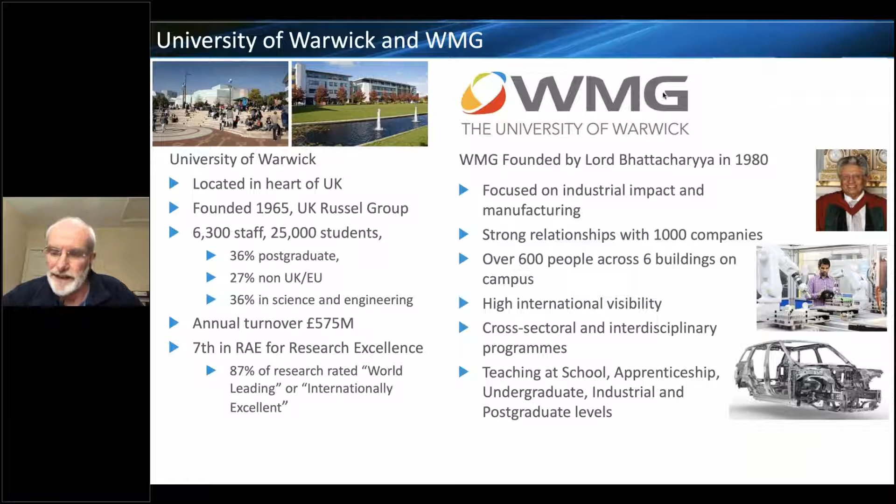I'm a Professor of Automation Systems at WMG at Warwick. For those who may not know WMG and Warwick, we're a department of Warwick University that has expanded greatly over recent years. We were founded by Lord Bhattacharyya in the 1980s, who built up our centre. We're also one of the seven High Value Manufacturing Catapult centres in the UK, so we're in a unique position as both an academic department and a member of this catapult organisation, spanning from early research through to commercialisation and industrial impact.

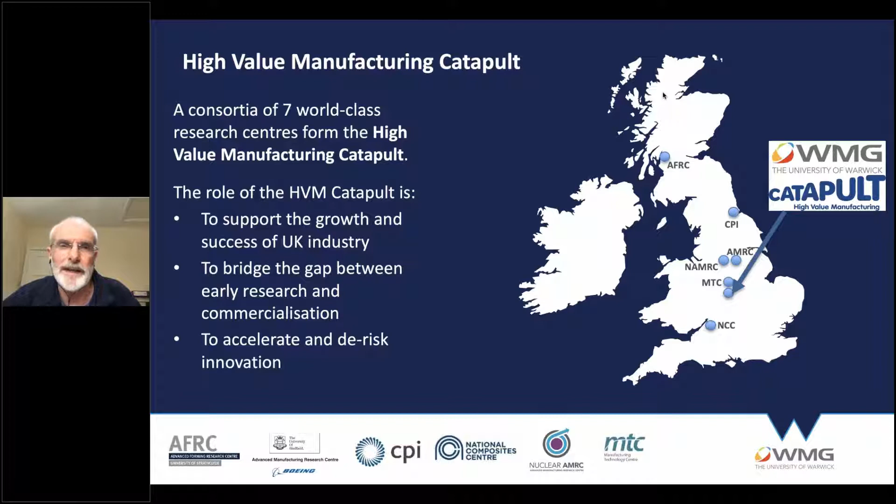On the manufacturing digital revolution: digital technologies are now impacting life generally, and in this talk, the way manufacturing operations are carried out. The term Industry 4.0, or fourth industrial revolution, is a trend in automation that combines several technologies, particularly interconnectivity and real-time data. It's the amalgamation and integration of technologies, as well as their individual, perhaps disruptive, capabilities and impacts. There's also the perspective of integrating digital technologies with physical manufacturing systems, known as cyber physical production systems.

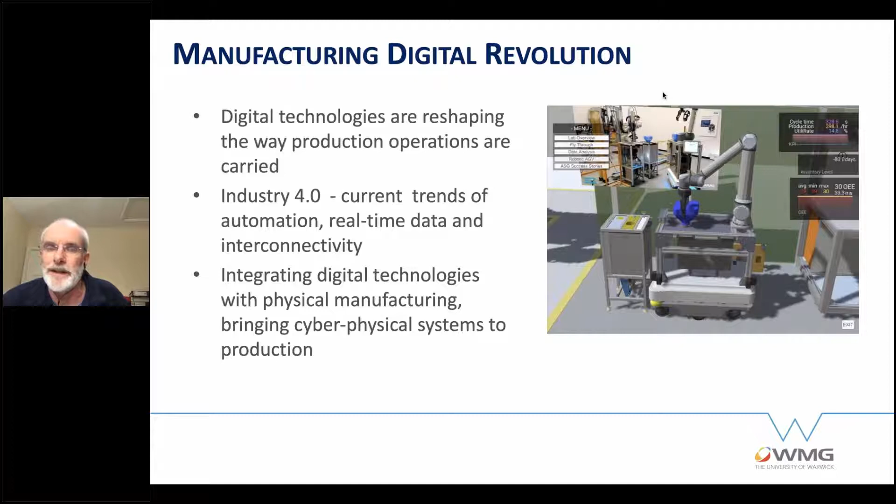The picture on the right shows examples of that, where there's a virtual image of an autonomous robot and a production system alongside its physical twin, in an environment where you can also display analytic and KPI data overlaid onto those scenes concurrently.

In terms of why and what these enabling digital technologies and capabilities are for, this slide, created by Koren, shows the trends from craft production, where you could have plenty of variety in a product, through to mass production, where you basically got one product as long as it was black, as Henry Ford put it, but at reduced cost while limiting product variance.

Now, coming back around the curve, that movement through mass production and globalization is heading towards more personalized products—from a volume and cost perspective, moving through to customization and user experience, and perhaps even more so now, not only having flexible systems but more resilient systems, where digital technologies can enable a lot more agility and reconfigurability in systems.

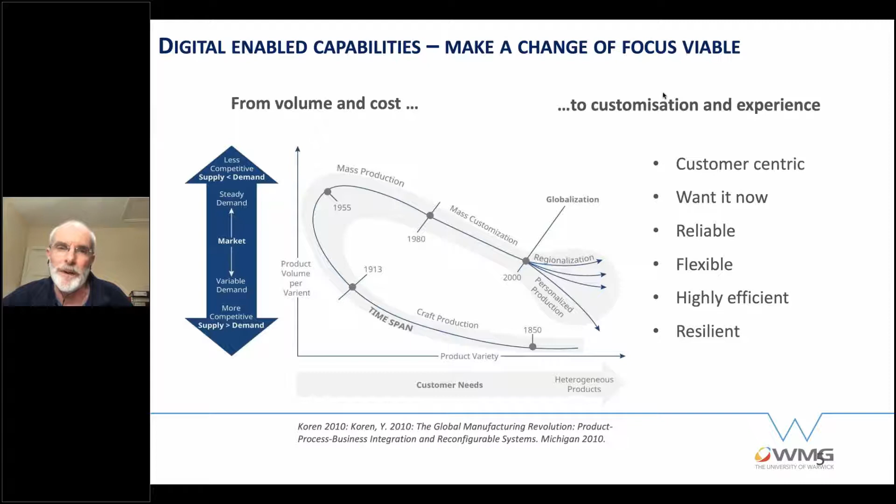I think all of you will be aware of Industry 4 as a concept, and perhaps the number of industrial revolutions that went before it - from steam power through assembly lines and mass production systems to the automation enabled by computers, and the advent of digital technologies in Industry 3, with Industry 4 being beyond that base level digital capability, moving to cyber physical systems.

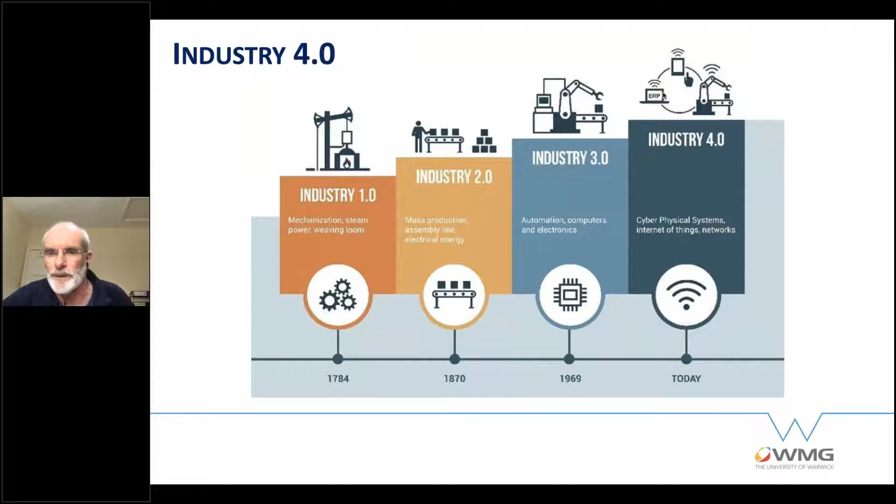I mentioned the Internet of Things, or the industrial Internet of Things in particular, and connectivity and networking in that context, linking both IT systems at the top floor down to the production systems at the lower levels, which in the past were really entirely separate.

So some key disruptive technologies - you'll see many perspectives and iterations and diagrams around this, but some of the key nine technologies are shown here in terms of simulation capabilities.

We'll see a lot around virtual models and simulation, the vital integration horizontally and vertically of systems, the industrial Internet of Things, the vital component of cybersecurity in these systems, and cloud computing at the higher levels, enabling collective devices broadly to be put together and high levels of computing power brought to bear.

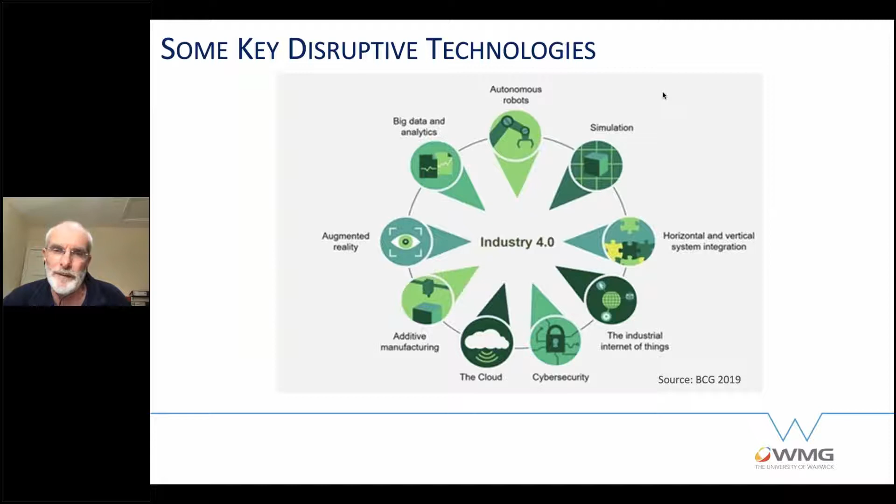Additive manufacture as a local, truly digital manufacturing perspective. Augmented and virtual reality are again important perspectives. And once we have hold of this data, the ability to use it via analytics is again a key component. Then at the top there, you've got robotics and autonomous systems, because another trend is towards more autonomous, independent, self-configuring systems in this technology perspective.

So why are we using and gearing off these digital technologies? Well, obviously this needs to impact business performance as well as the other aspects we've talked about earlier, in terms of perhaps opportunities now for more resilient production systems and flexibility. There are the sort of inherent aspects of what business models we can deploy.

Can we improve production in terms of cost and quality? Can we integrate and reuse what we have? Reduce time to market, which is obviously important - not to reinvent the wheel, but to utilize the models and methods we already have. Again, in the current context, can we reduce waste and run our systems more environmentally sustainably.

And connectivity across supply chains - in the smart factory context, as we'll see, that isn't just a single building, but a network and a connection of various factory entities, and the logistics and delivery systems needed to supply and integrate those. And then perhaps on the right hand side, that connected enterprise now is requiring and seeing this integration of information technology and the operational technologies on the shop floor.

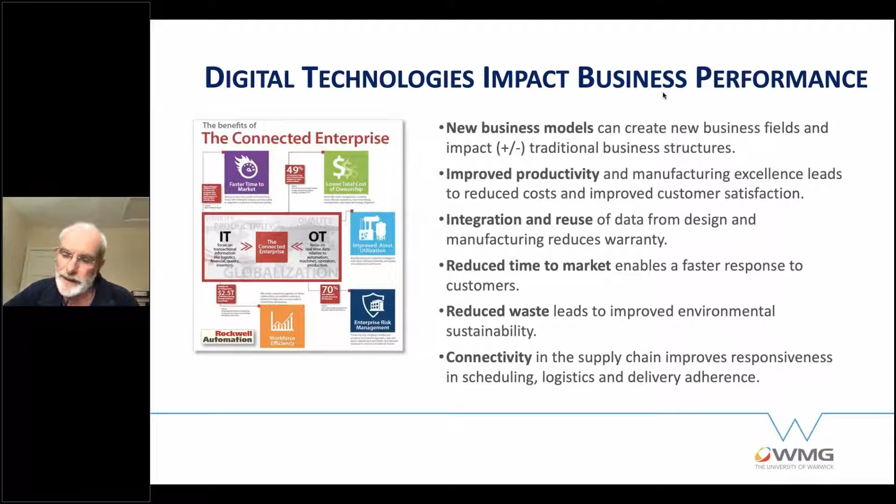From lower levels of embedded control and being able to pick up additional sensor data from the industrial Internet of Things, through building data models on top of the basic production system, so that there's the opportunity to model the physical systems and have ultimately real-time data from them, and then feed that into digital twins of those production entities, and so on.

It's vital to have security as we open up the areas of the system where they were traditionally closed and separate. Cloud services and infrastructure at the higher levels to integrate and provide the higher level perspectives, and then data analytics, machine learning, AI above that.

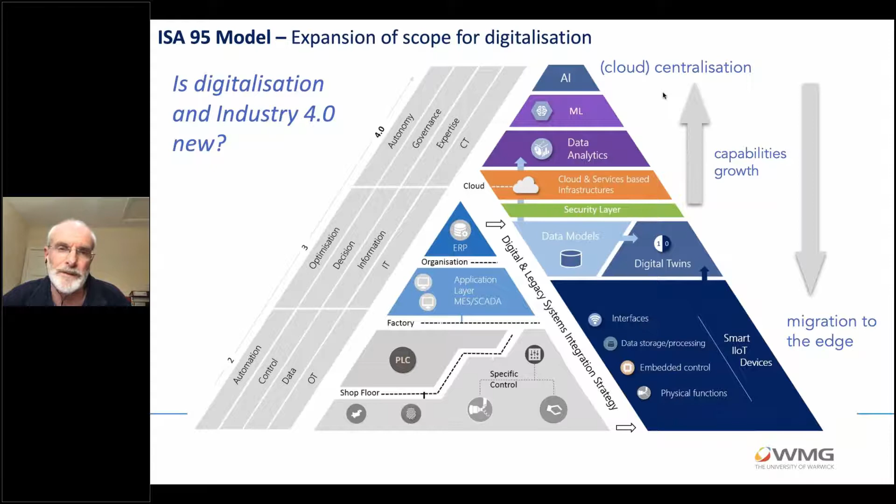So this is really very general and applicable to all domains, from the process industry, food industries, automotive, aerospace, etc. These are all generics that I'm talking about in that context.

So these are some points I'll quickly touch on. There's the seamless data exchange and communication, the use of IoT systems, cyber physical production systems to bring in smart machines, warehousing, and those production facilities. That's coupled with uniquely identifiable products, so each product knows its history, status, and how it's routed through the production system.

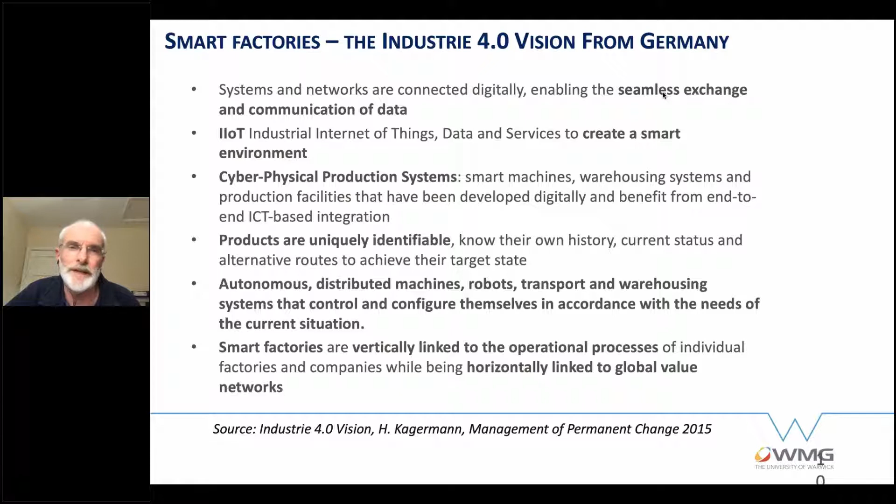There was also a vision of autonomous distributed systems, so each system can control and configure itself and adapt to the needs of the current situation. And then, as we've touched on earlier, smart factories being vertically linked to the operational processes and horizontally linked more widely in global value networks. So these were fundamentals seen at that time as being important.

And then out of that, it might be interesting to see the kind of amalgamation of these terms, methods, and approaches, and another buzzword that's gaining a lot of traction more recently has been around digital twins, dynamic representations of production systems which are updated potentially in real time.

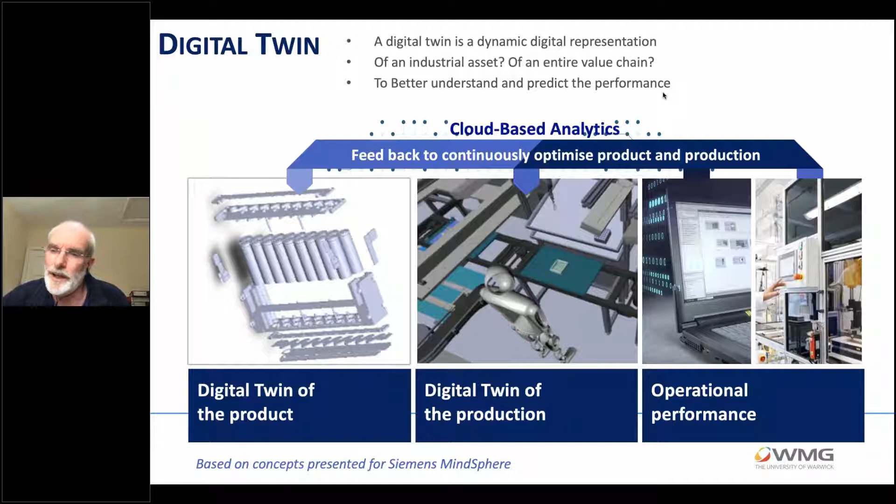In this context, you're able to cross-link between the digital, not only the operational system, but a digital twin of its production and a digital twin of the product, and then collectively being able to continuously optimize the product and its production. In whatever domain might be applicable, these digital twins and the underlying models behind them would be different, but the concepts and approaches would have a great deal of commonality in many ways.

So moving on to the myths and realities of this digital transformation. I've tried to go through the next few slides from some of the perspectives which are often mentioned, and to touch on, I hope, some interesting points.

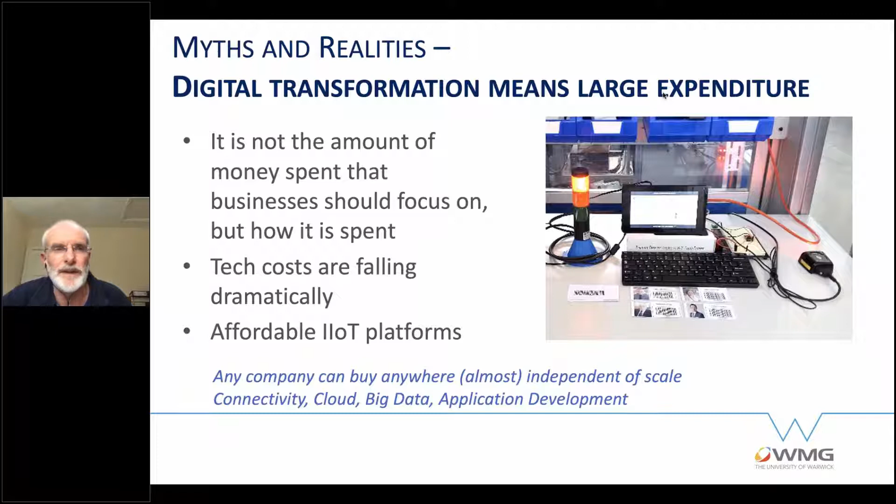Again, I think technology is too expensive - just to reiterate that point, MIT have done some studies, and we're really talking about an orders of magnitude decrease in the costs of what were traditionally expensive sensing, actuating, networking and computational devices. So GPUs and edge computing devices and so on are continually falling in price. There are a number of disruptive partners and companies coming into that market, and the traditional players are seeing competition from new entrants using non-traditional platforms for data processing, and indeed the traditional programmable logic controllers and industrial devices are seeing increasing competition.

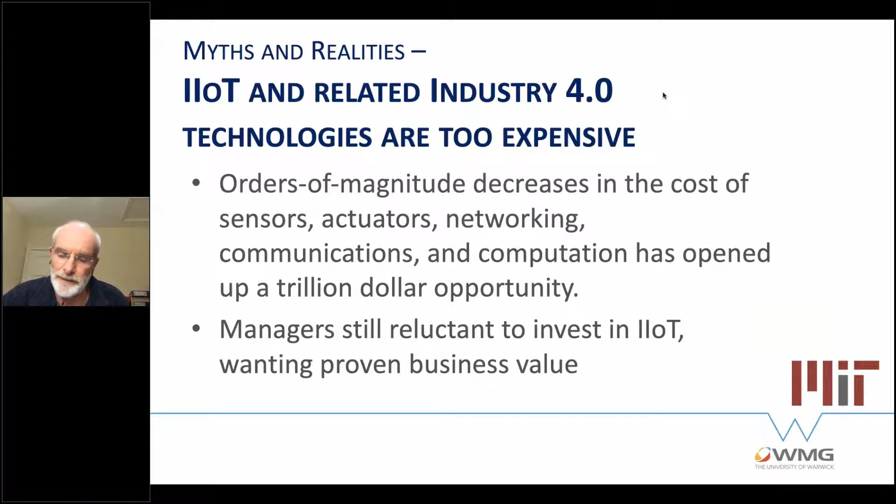In that context, managers are still reluctant to invest, perhaps. They want to see proven business value, and this is obviously a fast emerging and moving field.

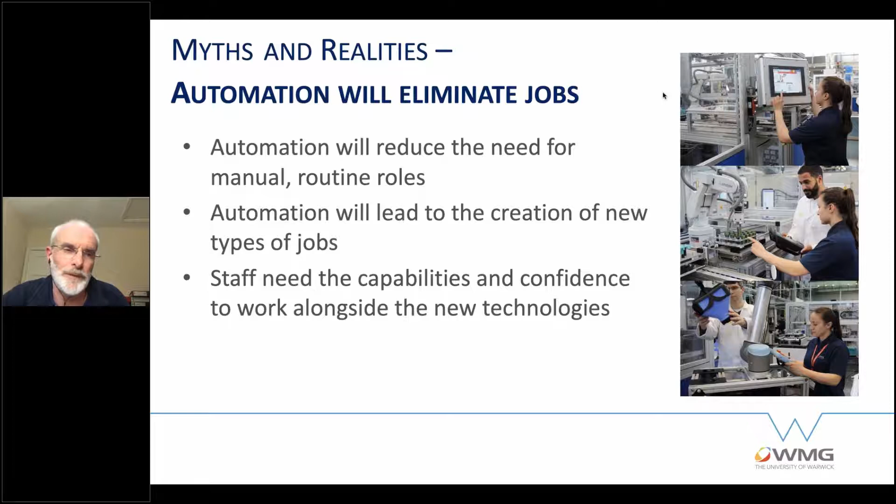Will automation eliminate jobs? I think it's inevitable that automation will reduce the need for manual routine roles in manufacturing, and we're seeing examples of that already. On the counter to that is the creation of new types of jobs, and staff capable of working with and alongside these new technologies and methods will prosper in that context. Hence the importance of skills training, retraining, providing relevant skills to graduates, and continuous through-career education.

Data, big data. Data is essential everywhere and a fundamental part of Industry 4 and the digitalization initiatives, and that's throughout the life cycle, from the way systems are built and designed through their operational phases to their reuse, and indeed through their use with the customer, because these are all areas of connectivity and integration that can add value and provide services. So data is key.

Simply collecting data is not enough, and we've had numerous examples in our projects where we'll get huge amounts of data presented to us, but it may be incomplete to solve the problem you want, or of very poor quality. There may be missing aspects of the data, or it may be collected in inadequate ways. So data needs to be leveraged, which may initially mean cleaning up and very much understanding that data before you start to try and analyze it and model it.

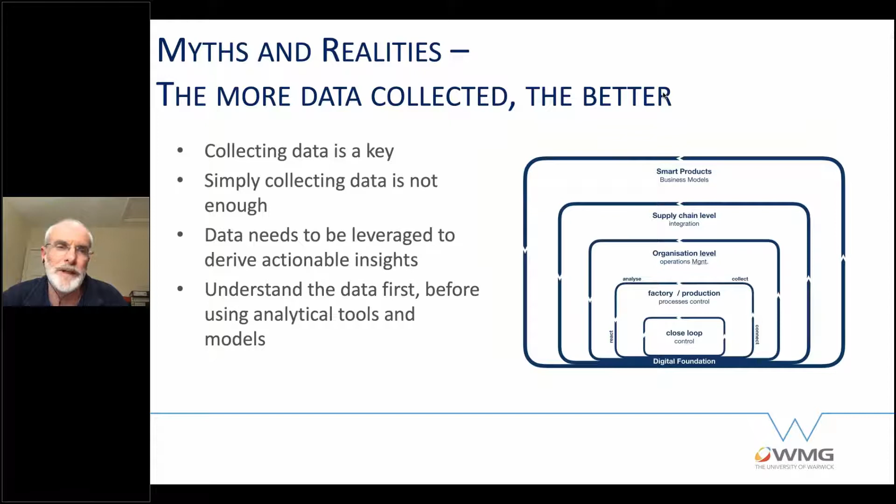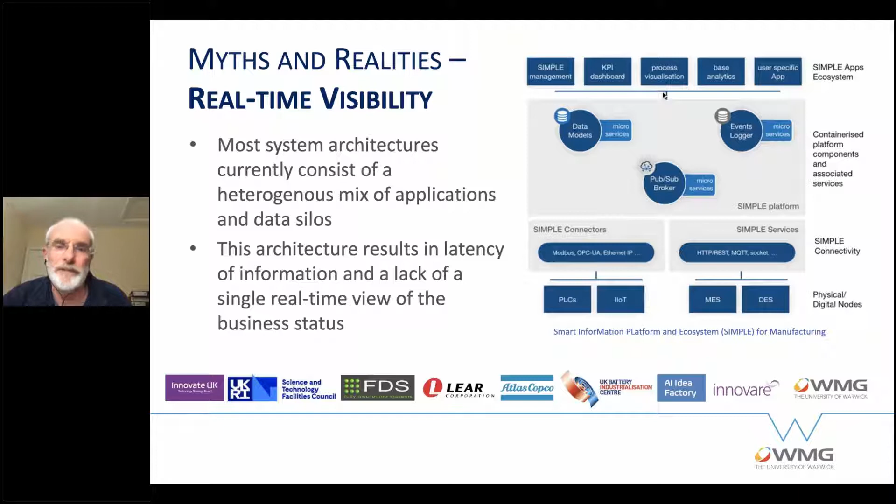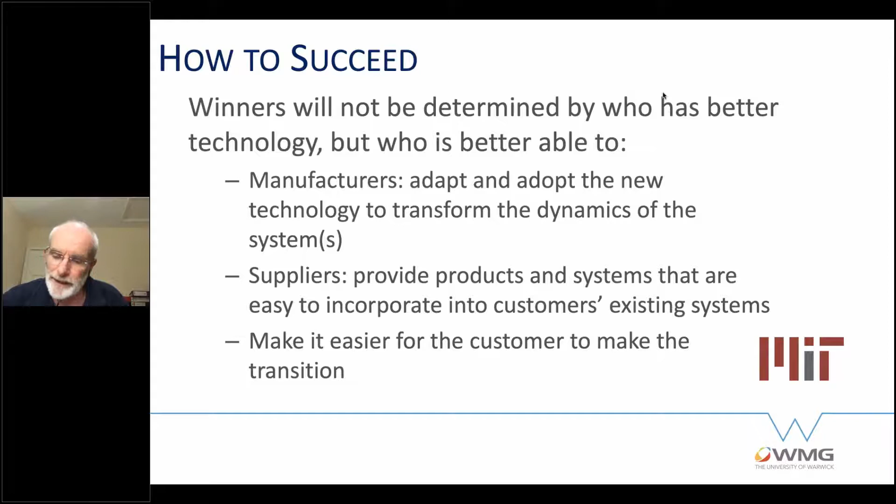Another general context of how to succeed here - this is again an evolving, very disruptive marketplace for those involved. Really, it's often not who has ultimately the best technology, but who's able to adapt, adopt, and offer the technology in a way which enables it to be easily used. So helping manufacturers adapt and adopt the technology to transform the dynamics of their systems, and suppliers to provide products that are easy to use by those manufacturers in the context of their existing systems - making it easier for customers to make that move to digitalization.

Again, talking about the stages and phases of the digitalization process - you need to do this stage by stage, and the foundations, as we mentioned before, are connect, analyze, react. Being able to have digital systems, being able to connect to them, be those IoT sensors or existing legacy machines or adding vision systems, etc.

Systems would run suboptimally, there will be many changes occurring, so the ability of systems to self-optimize - although they ultimately may not be running at the efficiency you might have seen for that idealized case - in practice they will be much more resilient, much more agile, and much more able to adapt, and have less central points of failure if they are more autonomous.

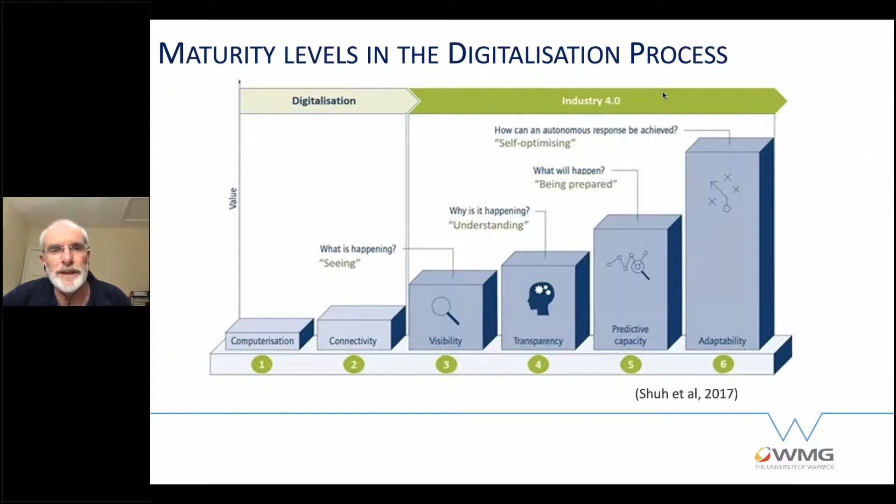So now, having talked about a few of those perspectives in terms of myths, realities, and the background, I thought I would turn to look at some examples of what we're doing at WMG in creating this kind of pathway to digitalisation. In that context, our work - and I talked about the department being a department of the university and a catapult centre.

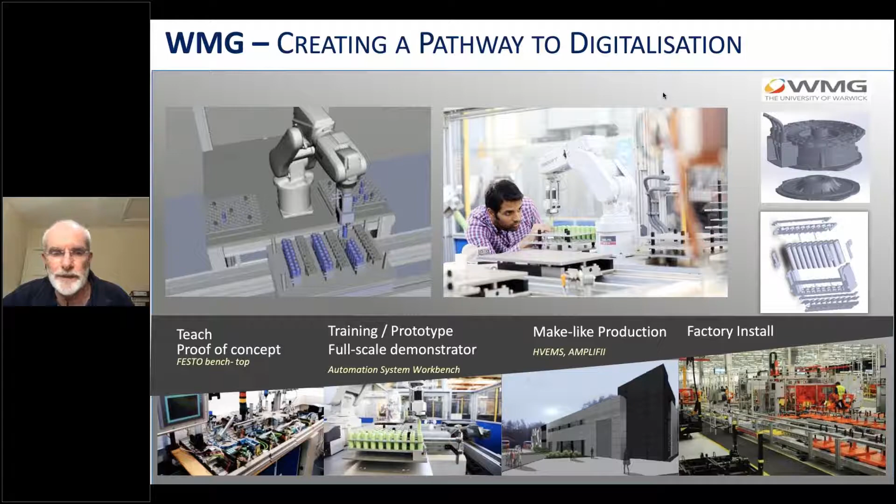We'd look at this from the points of view of proof of concept systems, demonstrators, make-like production facilities. We have a number of these, particularly in the area of electrification, the HVEMS and AMPLIFII projects at Warwick, then going through to factory installation. So there's that breadth and this idea of a pipeline or pathway to take new technologies through to full industrialization.

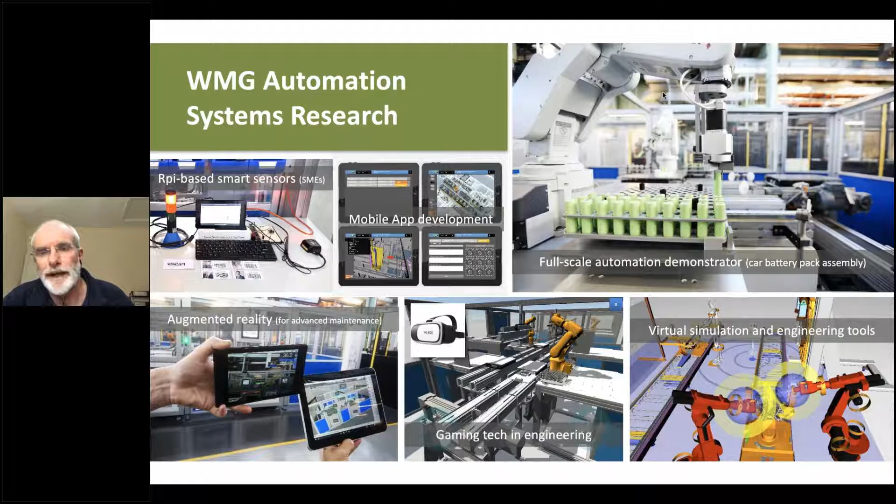At different levels, from benchtop demonstrators through to full automation demonstrators and pilot production systems, as I talked about in the last slide. So this is the span of automation systems group research at WMG, and that is just one facet of the Digital Technologies Directorate, which more broadly looks at cyber physical systems from the security perspectives, big data analytics perspectives, visualization. There's a digital lifecycle management group again, which is a very important aspect of this context.

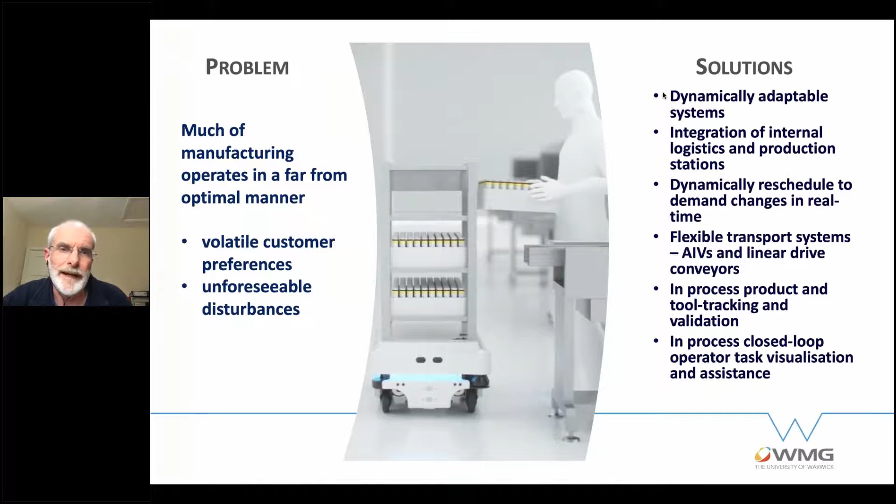One company, which I'll show in a couple of the examples going forward, is Lear, who make seats in the automotive sector. So here you've got a generally highly manual production environment where seats are built to sequence, actually, interestingly, and each seat is potentially highly customized.

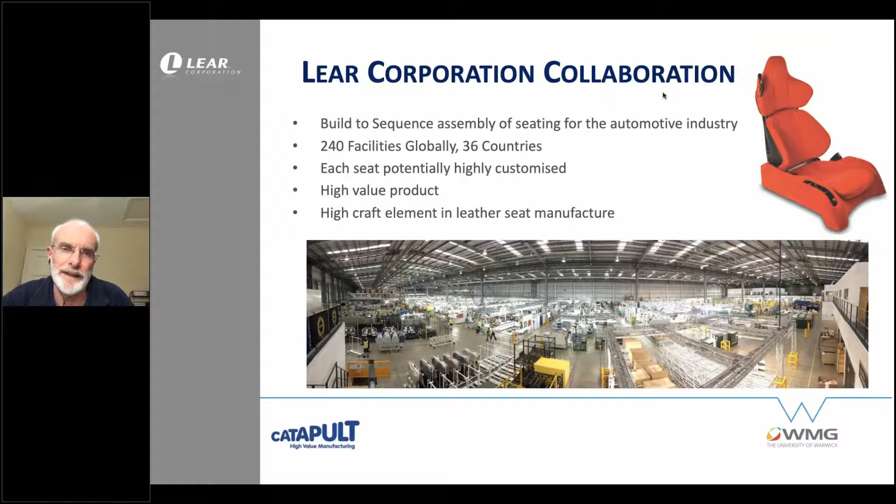So they may be not only different colors, but have many different features in terms of color, whether they've got heating, cooling, massage. The top end vehicles, it's a very high quality, high value item in that context. And Lear is an example of a company with global facilities in manufacturing this type of product.

In these kinds of examples of production where you're moving products around in many different small batches, or having to make, in a sense, batches of one of each color, but build to sequence in a high volume context, you can end up with a lot of non-value add while you've got sub-assemblies being brought together, and so on and so forth. So very often there's quite a bit of non-value add time in there, be that inspection, work which shouldn't happen due to rework.

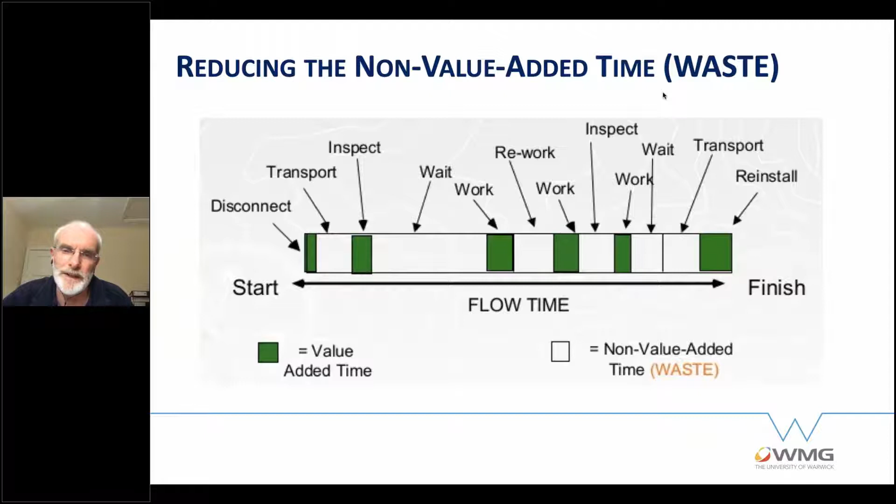And so on. So we have looked at some aspects of this, in particular with regard to integrating people and production machinery, and as I say, adding and integrating logistics with assembly operations to give a more adaptable and holistic approach. So we've been prototyping, and again, an area very much of digitalization is in the engineering tools, where much of the prototyping work and indeed verification and early validation of the systems can now be done digitally before the physical systems are built.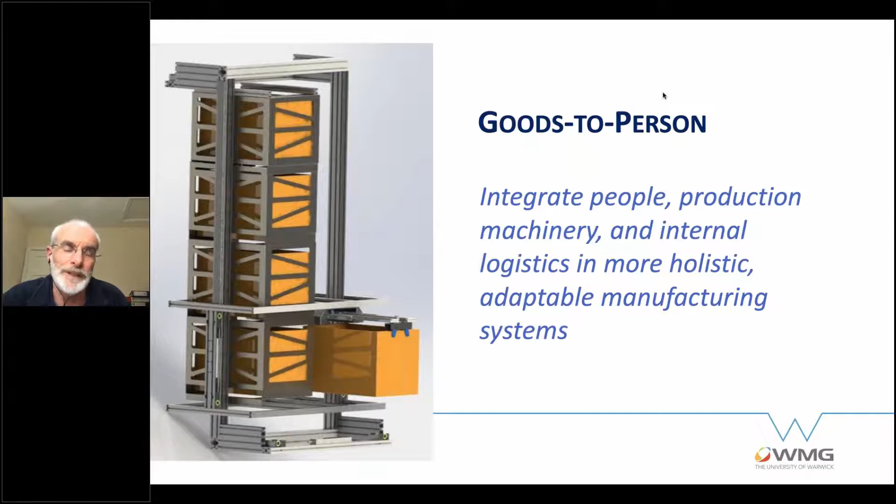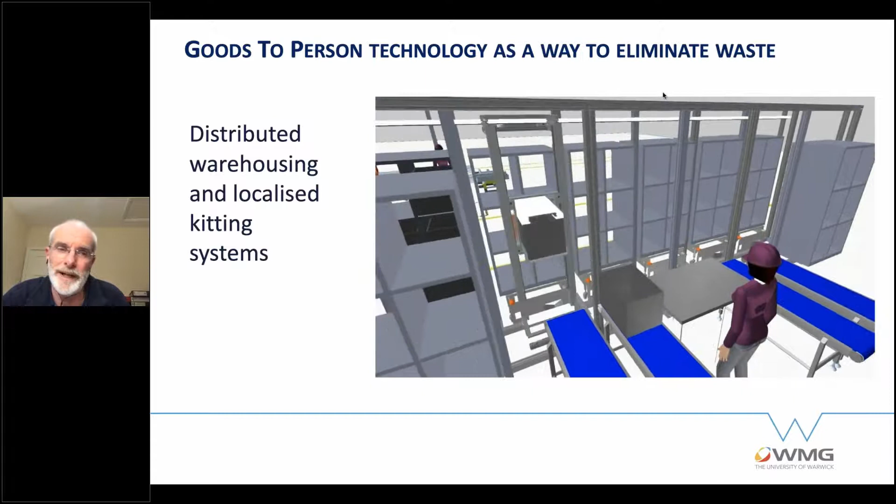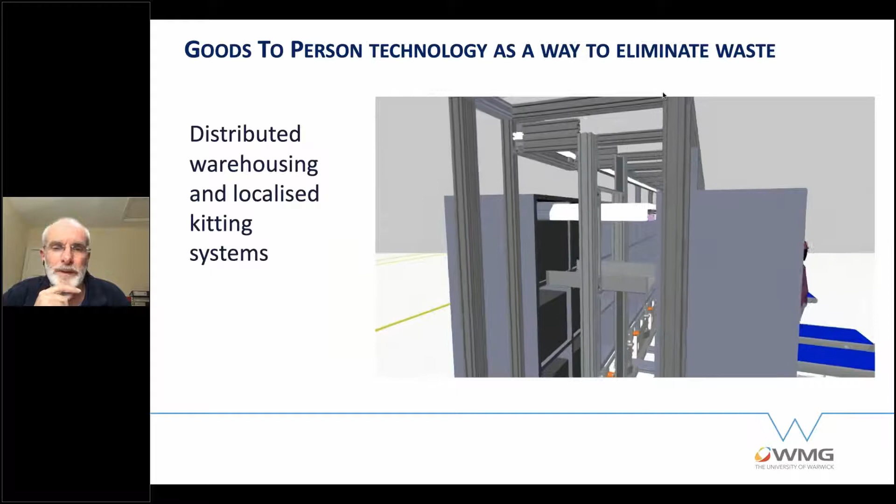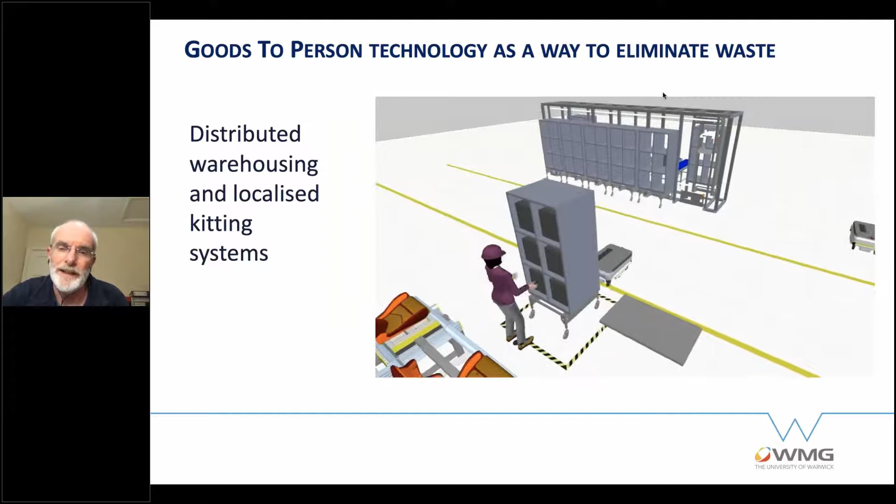So in this example, we've been looking at standard kitting boxes, which are used throughout Lear's production facilities, and we've been looking to, instead of having a centralized warehouse, have localized distributed warehousing and local kitting systems. So just an example here to show this idea of a local warehousing system and being able to move products in that context locally, then adding autonomous vehicles with laser scanners to be able to transport those around the shop floor.

So in the Lear shop floor, you would see a huge shop floor area with many boxes of product being handled in racks all around the production facility. So being able to move those in a more controlled, measured way, to track exactly where every consignment is, and to be able to develop new manufacturing equipment in that context, as well as the underlying digital technologies, is a key aspect of what we're doing with them.

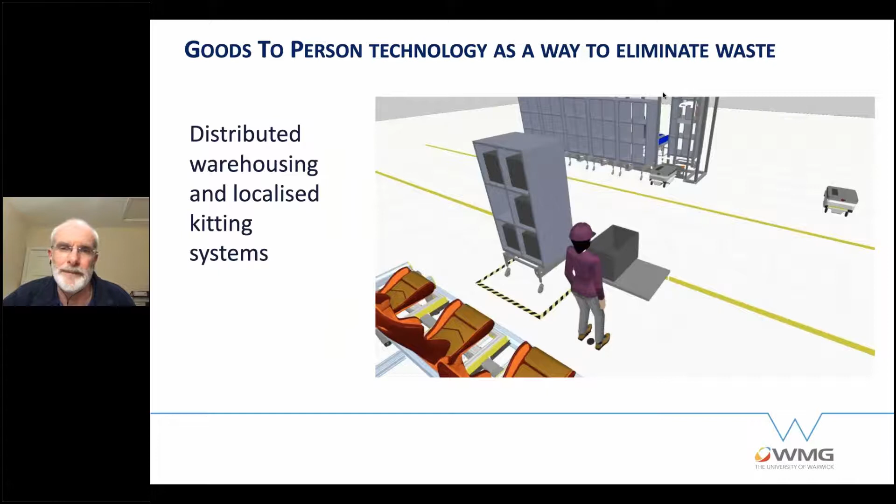So these are moving to more and more agile and flexible automation. Again, in this slide, shows an example - there's a little bit of animation on it on the right hand side, showing an example of being able to introduce cobots to the manufacturing processes.

So again, working and assisting the workers on leather seats for automotive vehicles. As you'd imagine, each hide is a unique one which came from a different animal, and it will have different defects. When the seat is made up, there can be different bagginess, requiring rework, or as they call it, finessing, to complete that surface properly to a high quality standard.

We've been working with Lear to look at how we can digitally measure the quality of the seat, through machine learning and the use of AI more broadly, to be able to analyze information from vision systems.

And then automate the seat finishing processes. On the left-hand side of this slide, there are other innovations we've been doing, which are linear drive conveyor systems, where again these are digital devices which are completely reprogrammable. So instead of having rollers and belts, we've got a linear drive, and there's a digital position for every pallet throughout its manufacture.

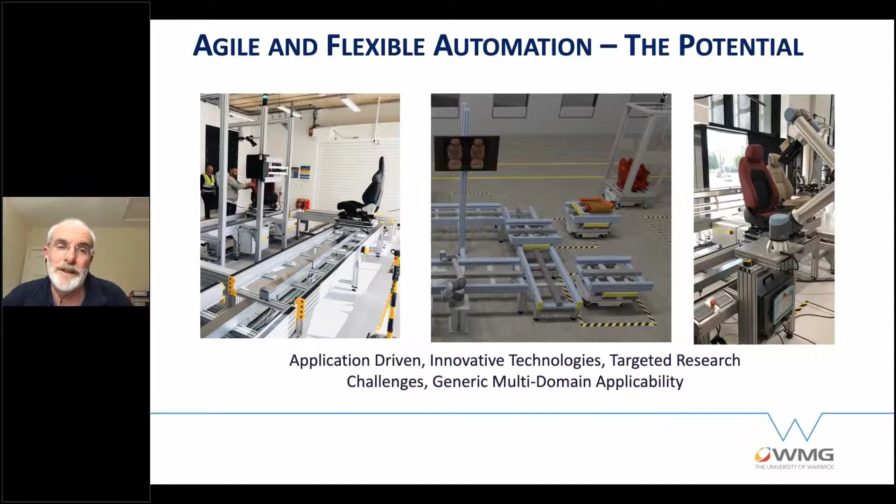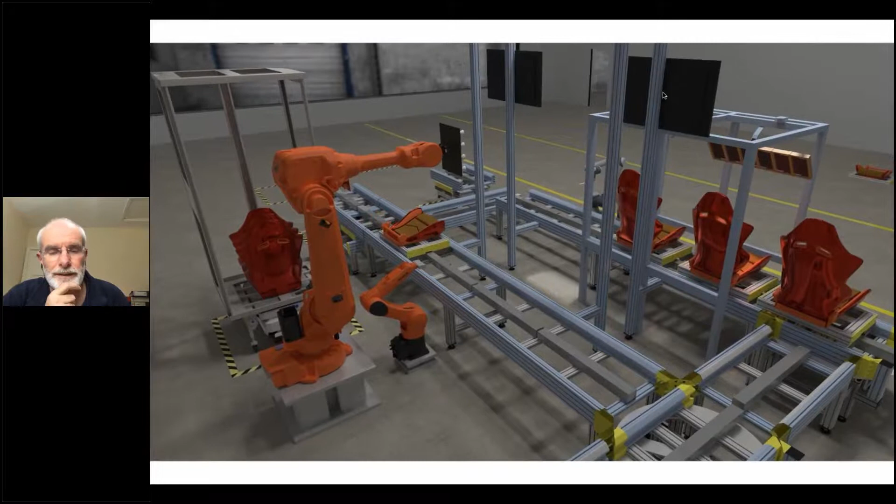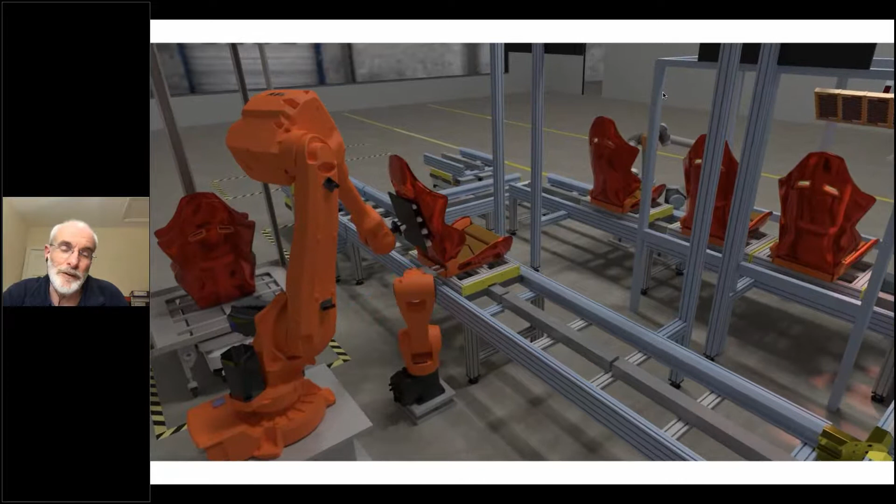This next picture is again a 3D simulation, and when I run it, you'll see some other aspects of the sort of concepts and methods we're developing in terms of greater autonomy in the manufacturing systems, combining the analytics capabilities I've talked about, and collaborative robots.

In this vision, this is just showing future concepts in a sense, but the thrust of this work that we're working on with Lear and with other companies in this future digitalization is smart factories, where in this context you 100% automate the manufacture of the car seats.

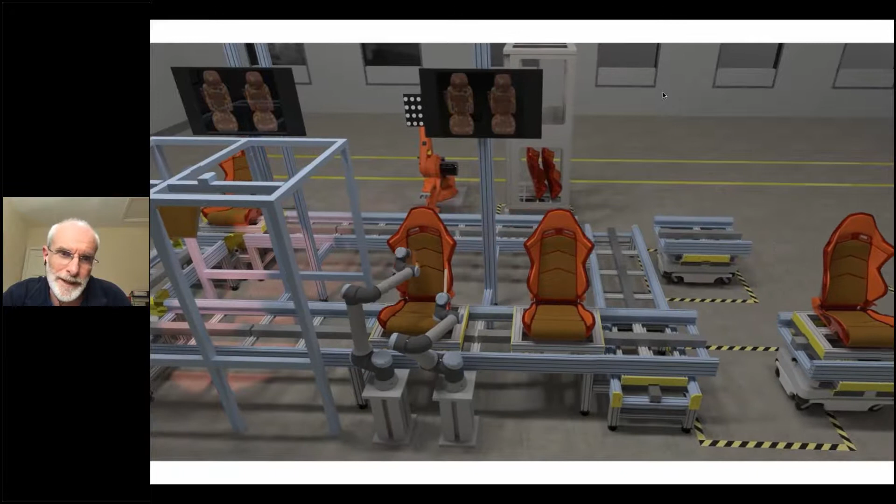So the technologies here relate to every phase of the digital journey, if you like, through the life cycle of such systems, in that we can shift a lot of the design work and conceptual engineering into the digital space, and then feed data back to those models. By using them as visualizations through underlying data models and what have you, they become a digital twin of the production system.

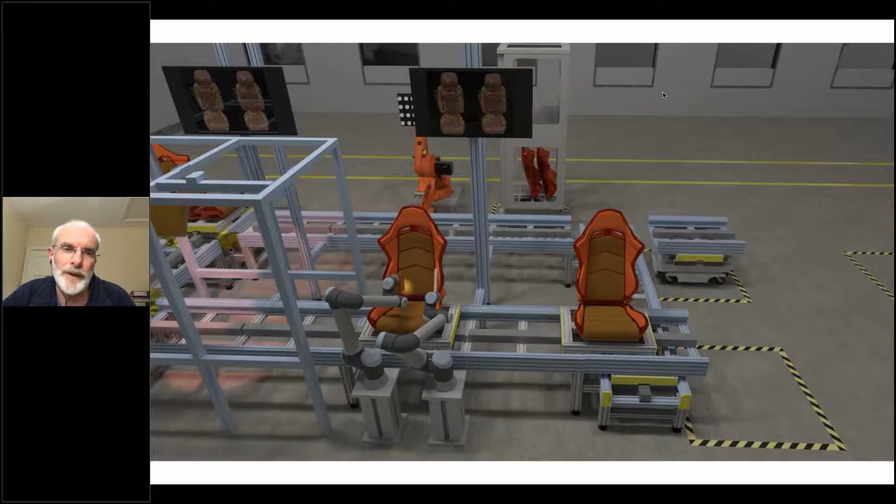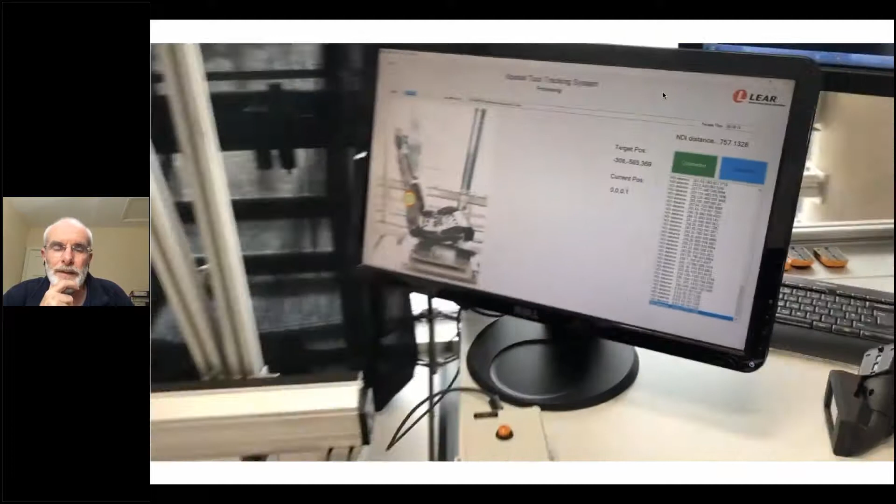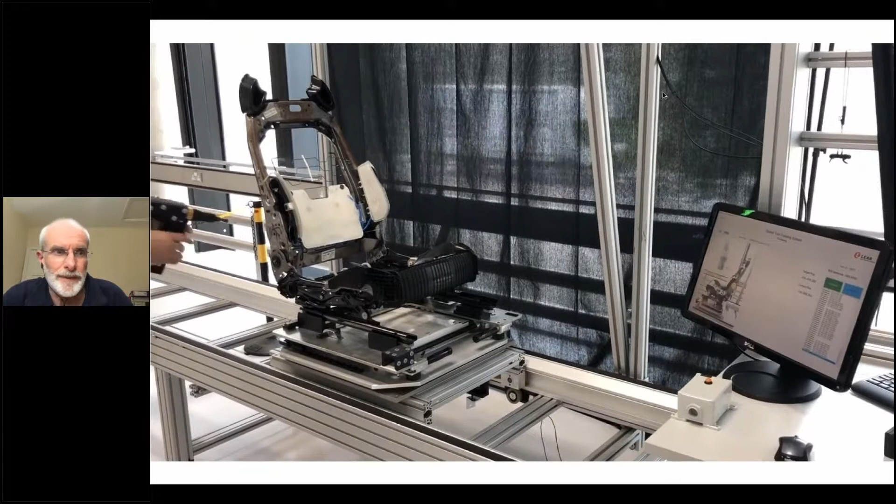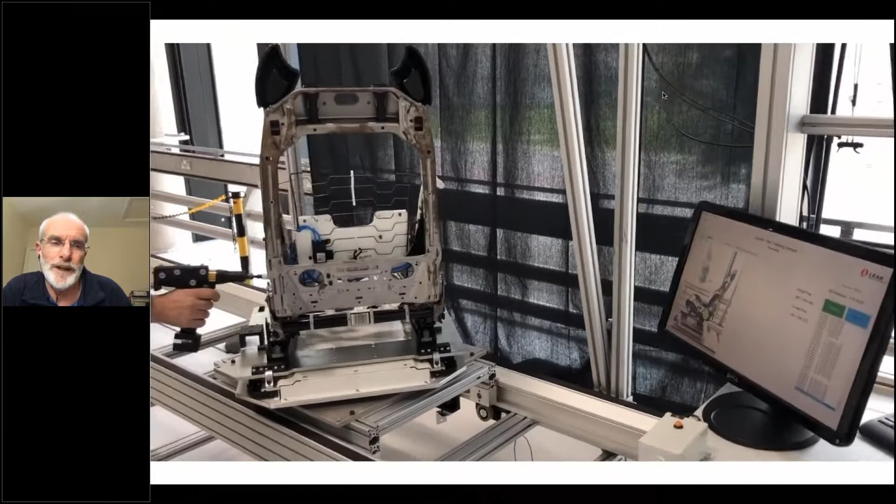There's another example here I can show you where we need to track tools on the shop floor in real time. Again, there are crossovers here with what you would see in the medical area in tracking operations. We're using similar technologies, but here we're using optical digital tracking technology to track the position of a tool in space.

That's integrated with digital work instructions, and it lets a validation process be carried out, so we know exactly which fastener has been tightened up, in what order, and we know not only the torque and angle from the tool, but we know where that tool was in 3D space. Now, this has similarly in the past been done with things like pantograph arms and what have you, but they were very unwieldy. So using either active or passive markers, we're able to track the movement of that tool.

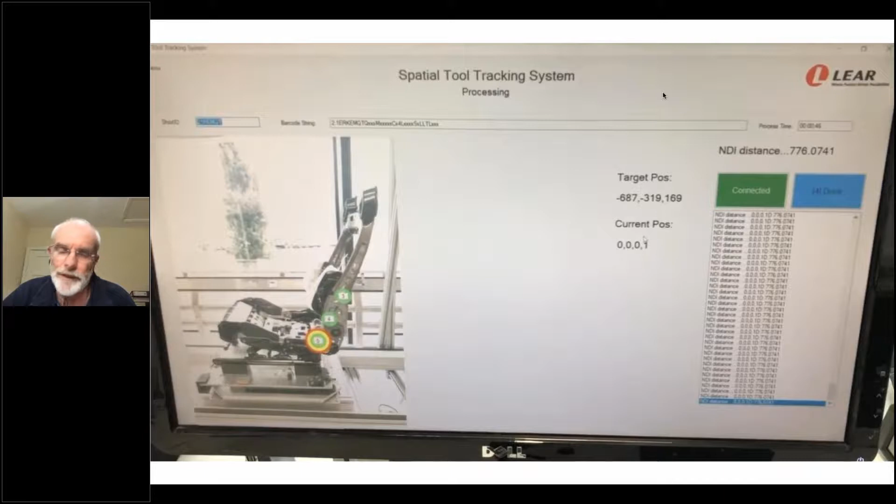We know which operator was doing it, and the seat has a unique identifier. So track and trace of the product is integrated with an understanding of what production operations were done, by whom, and at what time. This is obviously critical in the sense that there are safety critical components on a seat, such as the airbags and so on, which makes this very valuable, not only from the productivity and optimization of production standpoint, but from the safety and quality perspectives.

Another example relates to delivery of, in this case, rivets around the shop floor. Self-piercing rivets are used by Jaguar Land Rover, for example, and Ford in the manufacture of aluminium-bodied vehicles. Those rivets are normally sent manually to each of the riveting stations, and we've done some work around automating these kinds of delivery processes. To fulfill that, you need to integrate with the warehousing system and with the manufacturing cells on the shop floor.

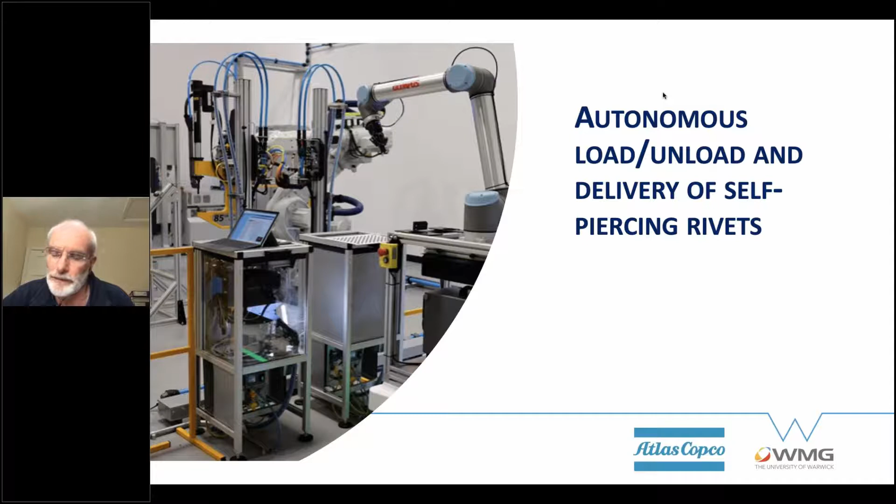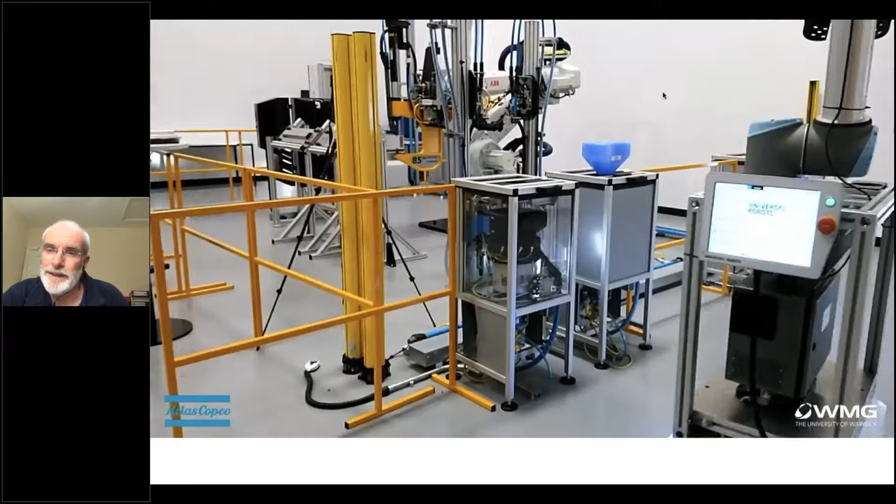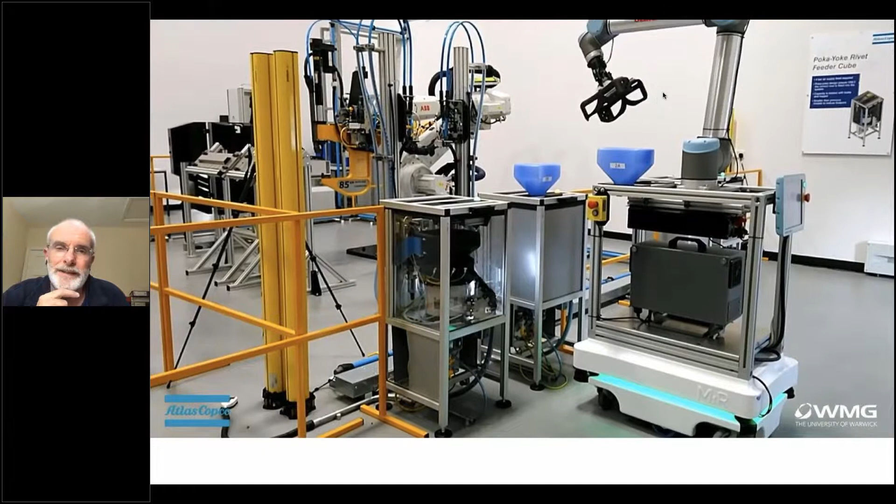So this is essentially like a milk round, delivering the full rivet containers and taking away the empties. You'll see the prototype here, which has been developed by our automation systems group. Again, there's an integration of a number of different technologies here, in the sense of using machine vision. The grippers here were additive manufactured.

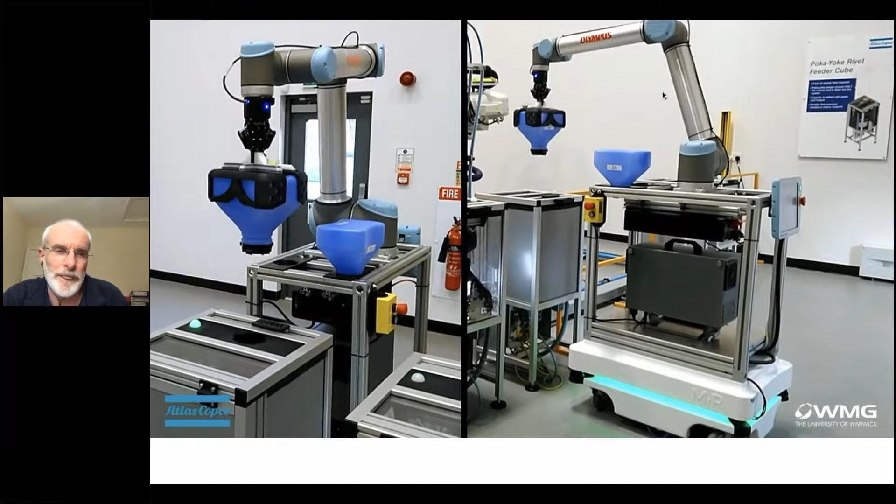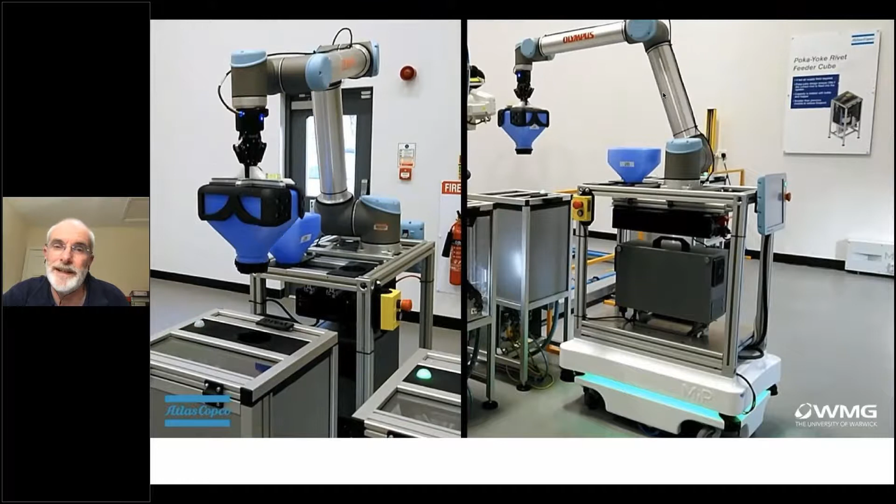It uses a cobot. It's within an autonomous system, and obviously that fits into the higher level production environment to be able to schedule the delivery of the right fasteners to the right machine at the right time, and again at higher levels would relate to the quality and operational performance of such systems.

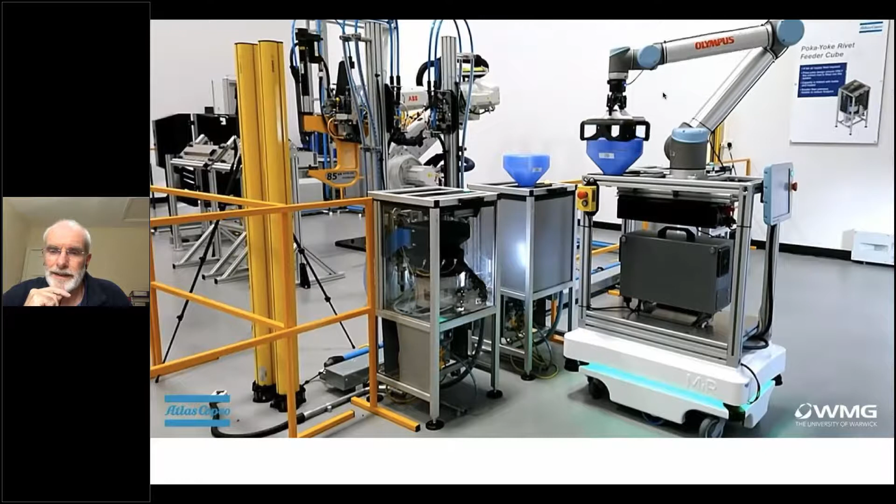So this is an autonomous mobile robot, a MiR. It's using laser scanning, so it's not following any tape on the ground. It follows its own path and can negotiate its way around obstacles in its path as it goes, and reroute itself around them.

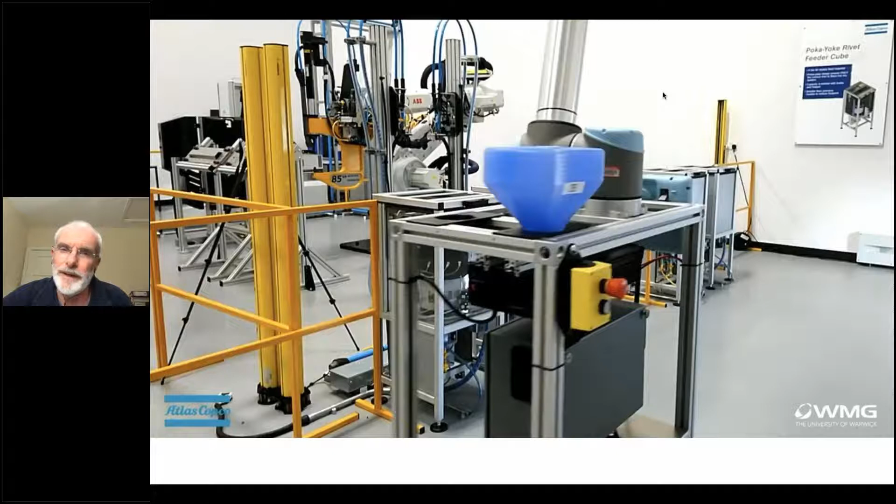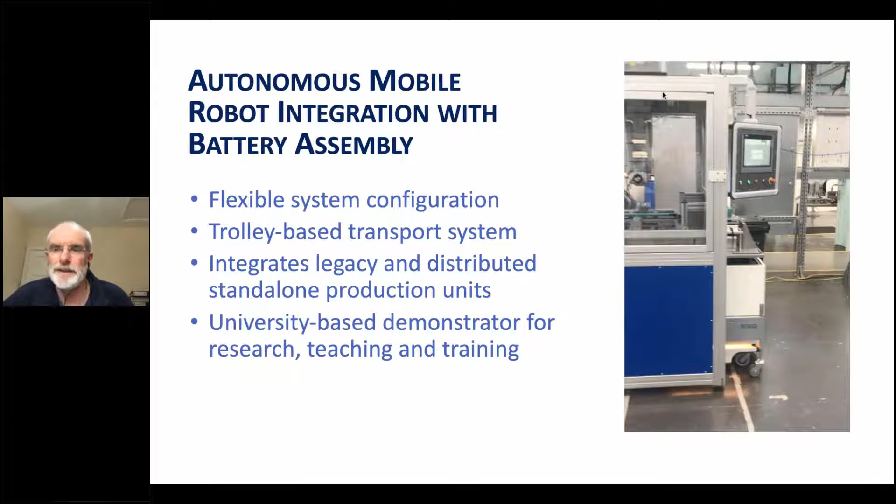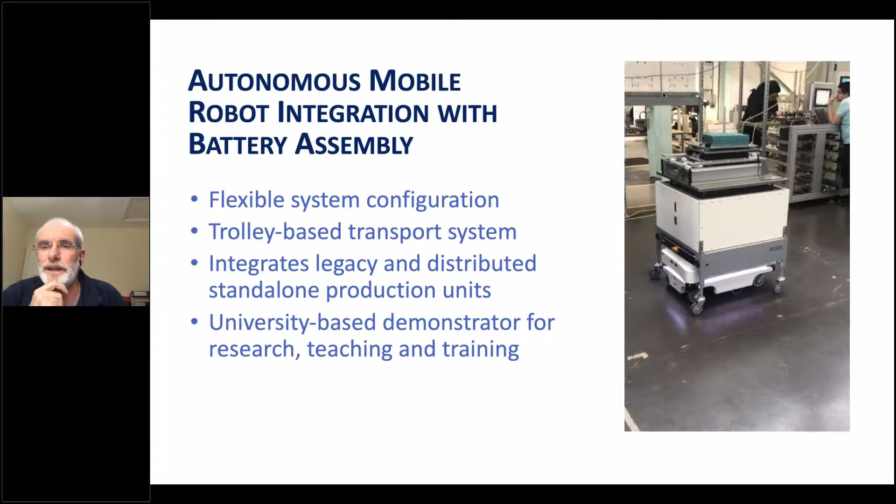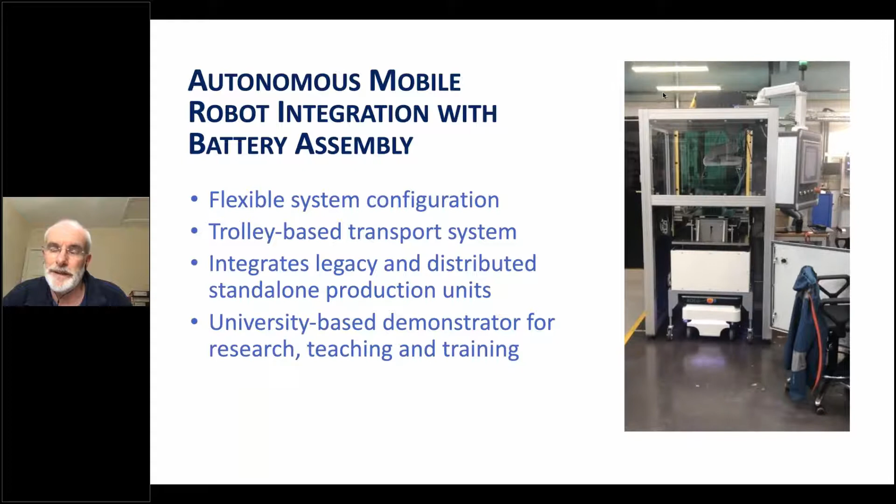Another example, just to touch on briefly: we have development facilities for a number of aspects of battery assembly, and one relates again to autonomous mobile robots, in this case being used to transfer battery modules between machines. So here's an example of a distributed manufacturing system where we've got a separate machine fed by an autonomous mobile robot, rather than being in a conventional production line.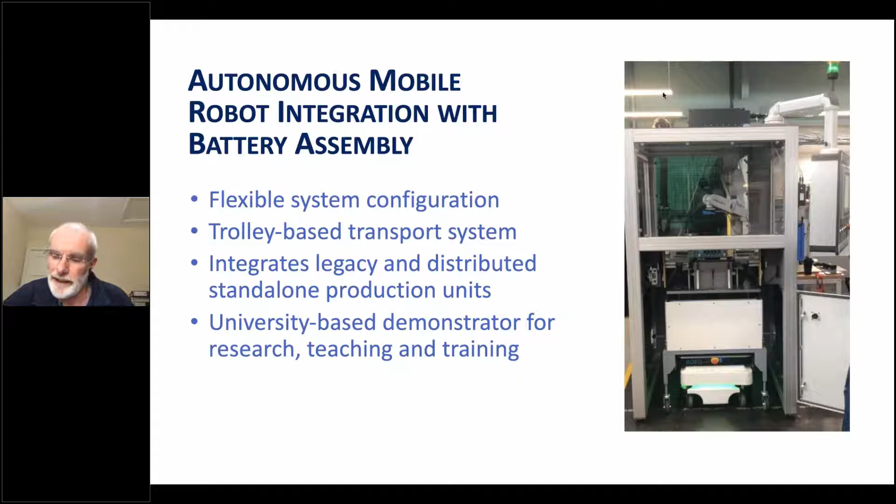So we have a demonstration area for digitalisation Industry 4 training at WMG, and this shows an example of the sorts of integrated technologies in the context of digitalisation.

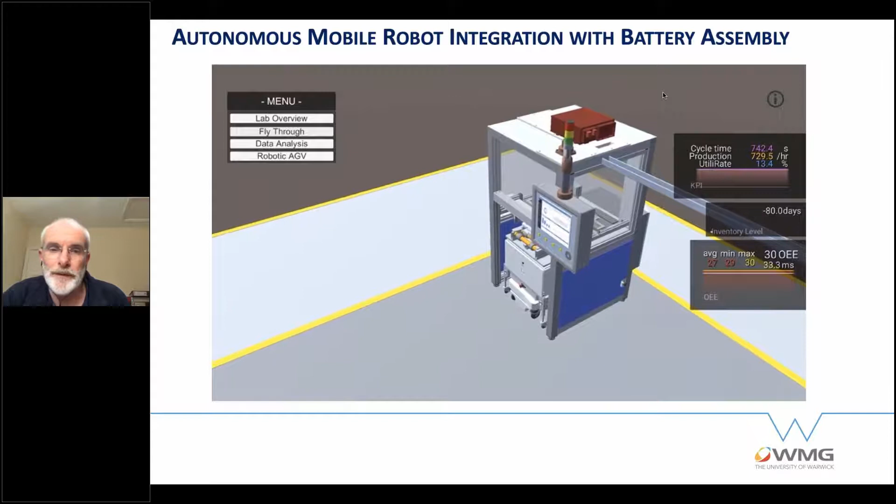Moving on to quickly show you something around visualization and modeling. This is an example built using gaming technology, Unity, which shows a visualization of the same production system. You can not only build 3D models and relate them to the physical system, but overlay dashboard information, key performance indicators, perhaps select different views related to data analytics and what have you.

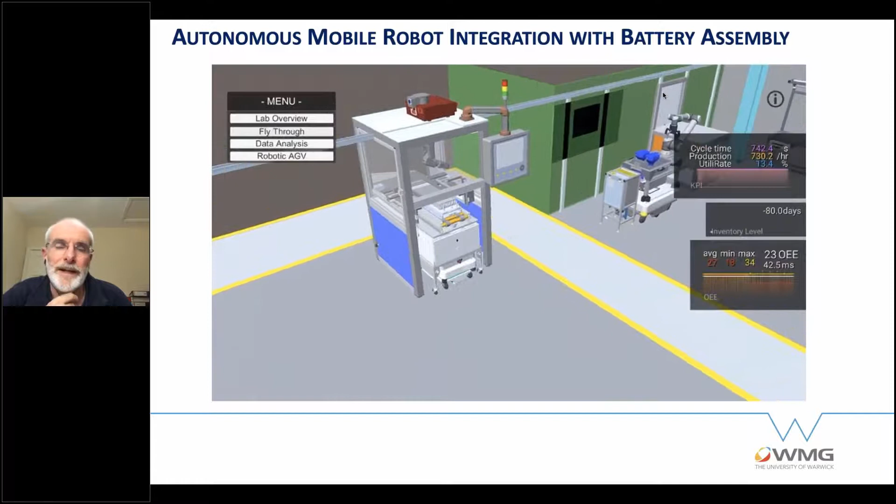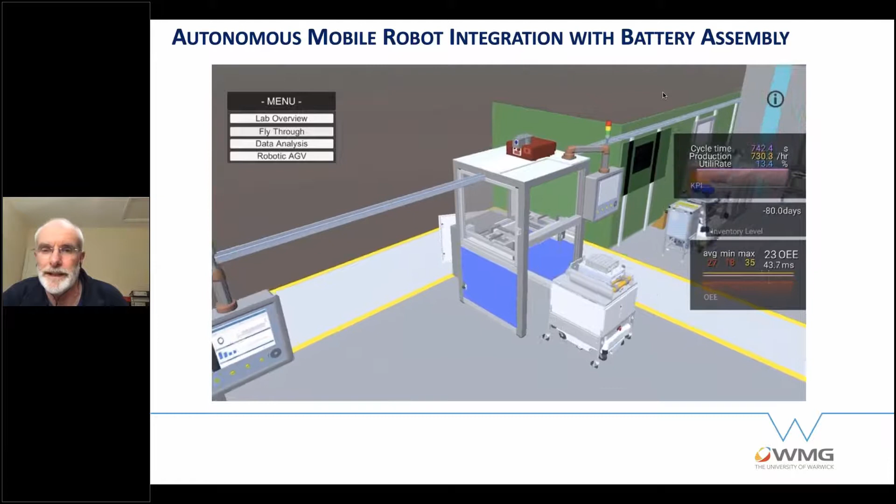So it enables you to have physical and virtual views of your production system, which can be used for remotely supporting the activity if you're feeding the real positional data of the systems through, for visualizing, doing what-if analysis, or to help with support and maintenance examples, for example.

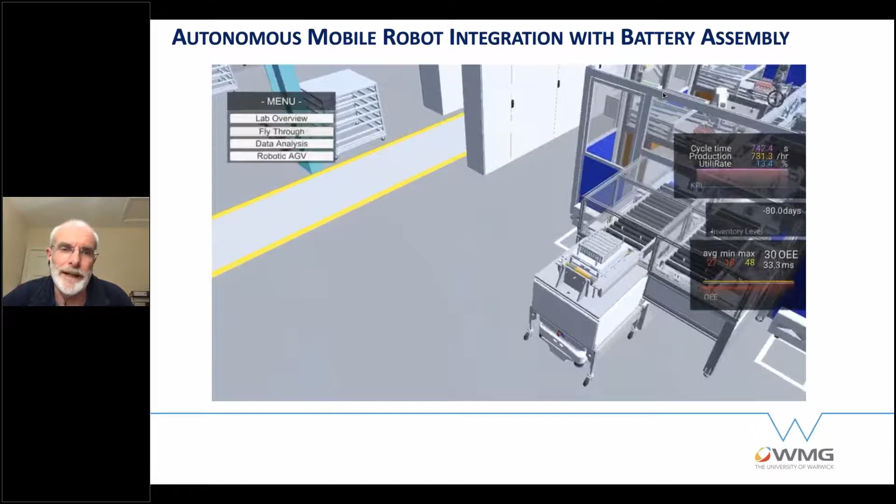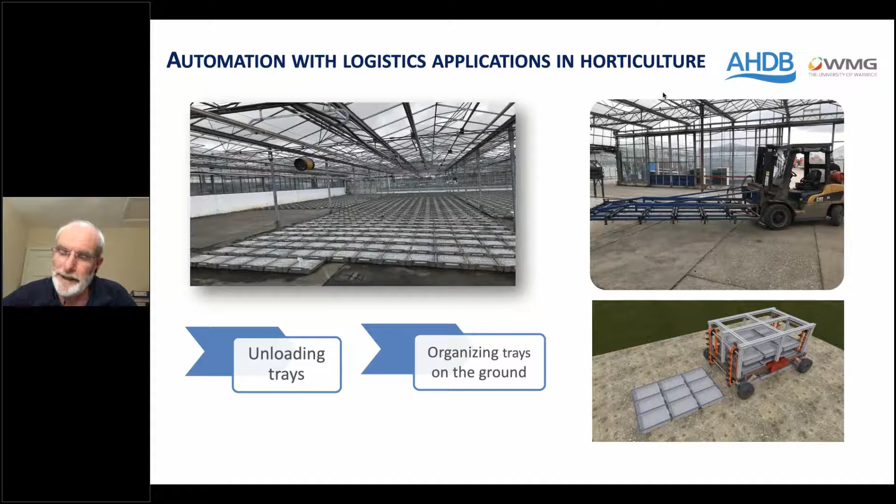Yet another example to just show you quickly. This doesn't have to be just in the space of a traditional manufacturing plant. Here's an example where, with the AHDB, the Agriculture and Horticulture Development Board, we are looking at improving efficiency in horticulture, transferring seed trays between different locations. So again, it shows the power and usefulness of digital modeling in being able to model and visualize use cases and evaluate them prior to the next phase of this project, which is building the physical autonomous mobile platform.

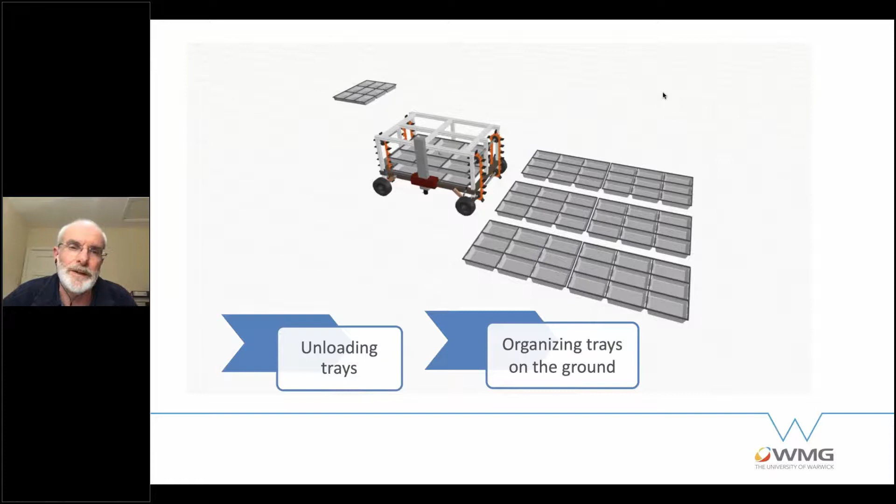So I hope those examples have given you some food for thought and insight into the work that we're doing. I wanted to finish off by talking a little bit about the context of COVID-19 and the current situation.

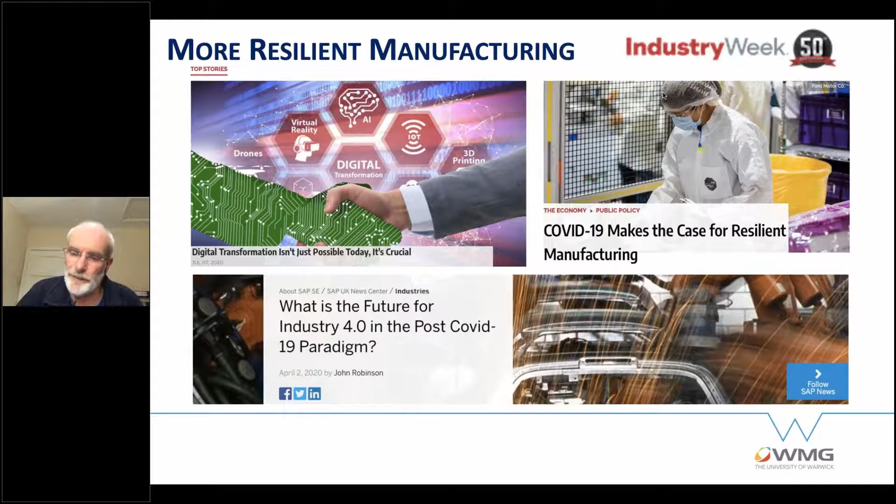You've probably seen in the press, what's the role of Industry 4? Can it help make production systems more resilient? There are a large number of articles in the popular press about that. So how can this digital revolution help address these wider challenges?

I think some of that relates to having a larger amount of data and the interconnectivity between systems, and in particular having separate autonomous systems which are able to self-optimize and reconfigure, offering the opportunity for greater resilience, both within operations and across supply chains. So there's more opportunity for configurability and flexibility in such systems.

Optimizing those systems can reduce their carbon footprint, and in a wider system-of-systems context, help reduce waste by cross-relating a building with the factory machines within it, its air conditioning systems, its wider supply chains, and again reusing, recycling, rebuilding, reconfiguring systems. They fit well into the realization of a broader circular economy, and indeed the products can be revisited in that context.

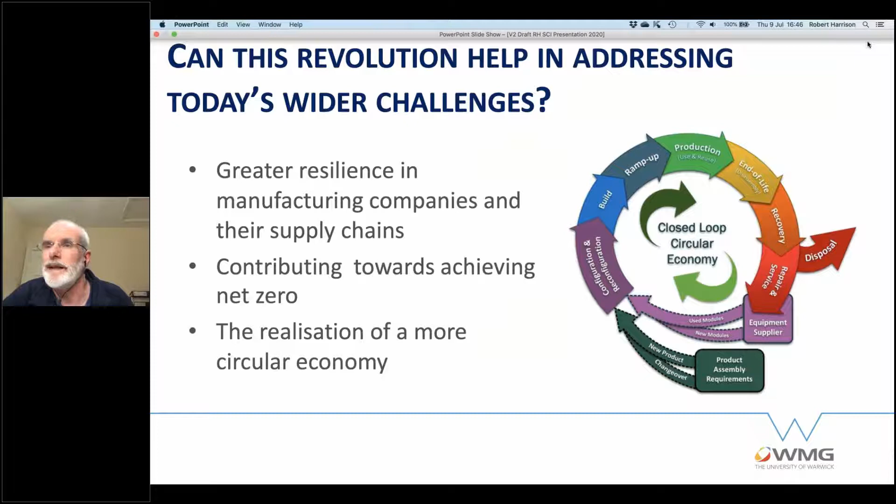So if we just look at some specific examples, how can these kinds of capabilities help? Well, real-time visibility lets you understand the current situation. If you don't know the current situation, you can't react to it properly. AI and machine learning will and should allow you to reassess and replan efficiently once you have such systems robustly in place.

Automation can get rid of those non-value-add activities we talked about. Augmented and virtual reality can help workers perform their jobs better, assisting them where they may not have some of the skills.

We showed some examples of digital models. You can use this and couple it with AR or VR to offer remote support and improve the availability of assets, which can be supported from another part of the world, indeed, or another part of the country. So particularly in the current context, enabling such capabilities is important.

Again, remote and virtual working, for remote maintenance and remote support in other ways, goes hand in hand with that, using AR, VR and digital twins.

You can locally manufacture, which gives you more self-sufficiency and flexibility. So additive manufacturing and digital printing may enable you, whether that be spare parts or actually flexibly making the product locally, an important capability to offer more resilience.

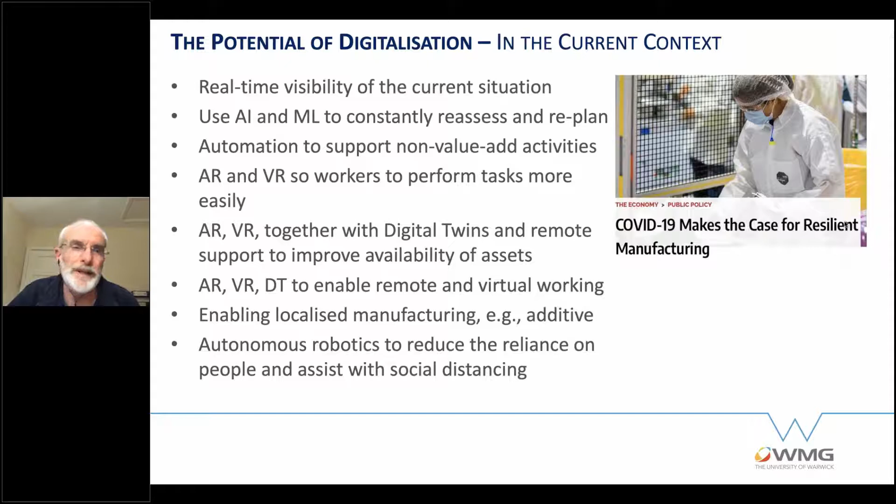And then maybe to finish in terms of future vision.

I hope through what I've talked about, you can see it's very interdisciplinary. There are many interconnected systems and need for collaboration, both between individual technologies, because the whole offers much greater value than the parts. And it's cross-sector. There's many different cross-sector applicabilities and commonalities that can be geared off, and there's the integration of IT and operational technology.

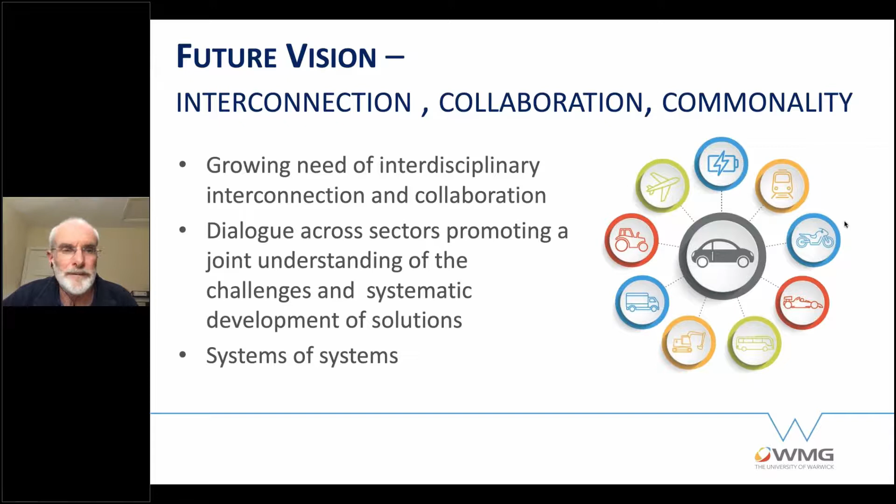So openness in these systems, being able to promote dialogue across sectors, promoting joint understanding, systematic development of solutions which are not too vendor specific and are open, and in the broader sense of how factories fit with future cities and energy systems. That system of systems will allow greater optimization in a collective sense to the benefit of all subsystems, which in the context of net zero and sustainability will become more and more important, as well as offering the customer the ability to customize and have choice. So thank you very much for your attention, and I welcome your questions.

Okay, Robert, thank you very much. So before we throw the floor over to Tom and Heather, please, if you have any questions, put them into the questions box. I'd like to start off though, Robert, chairman's privilege and all that. You've worked around Europe and around the world, and we've been talking about this for a long time. Is the UK actually getting there fast enough, or do we need to make this transformation faster? And if so, what can we do about it?

Well, I think we're getting there, not as quickly as others, where perhaps the classic example would be Germany, who are investing more and probably have a more stable and patient way of investing and supporting these kinds of technologies. I think on our side we are innovative. There are lots of new ideas and quite a lot of startups coming. I think in the context of our digital manufacturing centres like the catapults and other universities, there's an important role there in terms of training, both in educating the students with the relevant technologies and methods, and being able to bring people in from industry to help them and have exemplars of the technology. And then I think it's solving the right problems and encouraging our small and medium-sized technology partners to be able to help the larger companies.